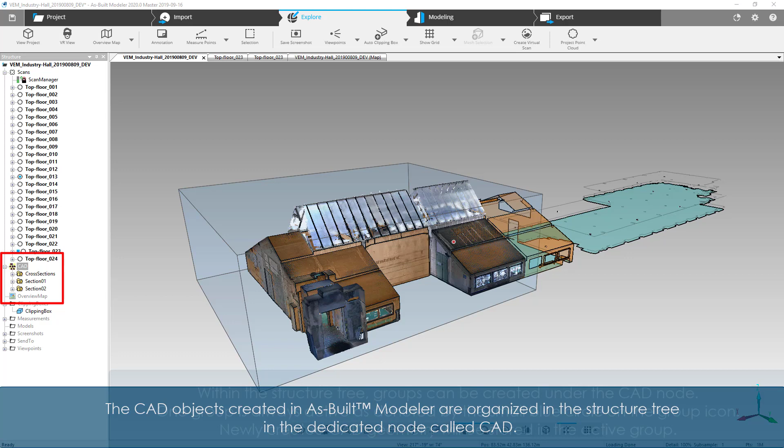The CAD objects created in As-Built Modeler are organized in the structure tree in a dedicated node called CAD. Within the structure tree, groups can be created under the CAD node. One group is always active, as denoted by the small blue circle on the group icon. Newly created CAD geometry will be stored in the active group.

Right-click a group and select Active from the context menu to set it to the active state. New objects will now be stored in this group. The structure tree not only allows you to organize your data, but also steers the visibility of your objects.

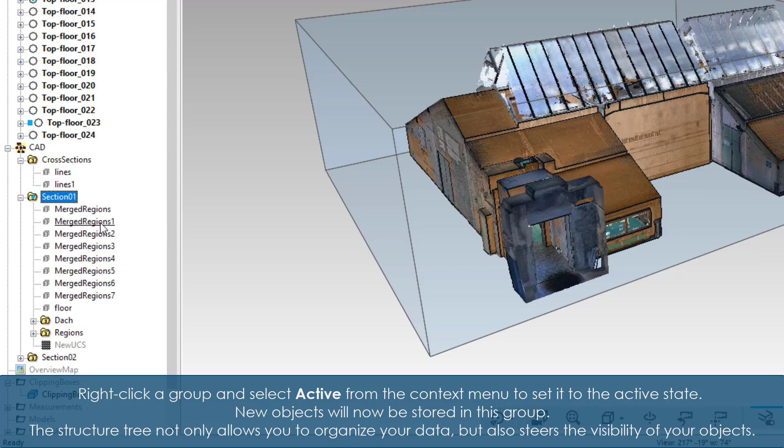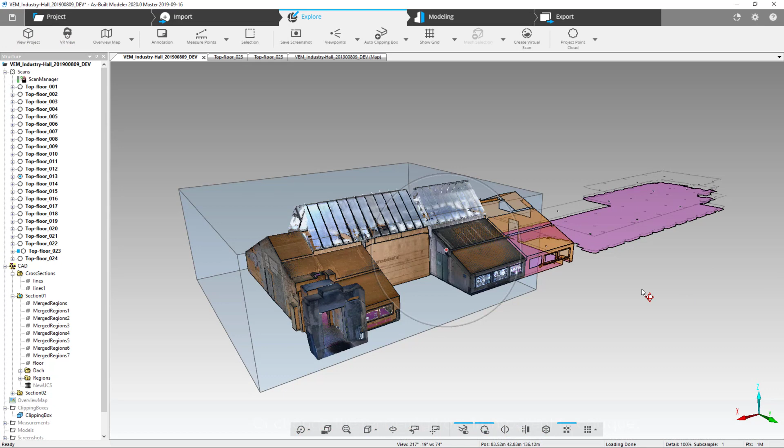First, from the 3D view, click a CAD object, which is then highlighted in green. Right-click the CAD object to get access to the context menu. A different color can be selected, for example, purple. Or change the rendering from transparent to opaque.

Notice that an object selected in the 3D view will also be selected in the structure tree, where the same context menu can be accessed.

The structure tree also allows multi-selection. Select a collection using the Shift key. Right-click the selection, then set a color for the entire selection, setting all to yellow.

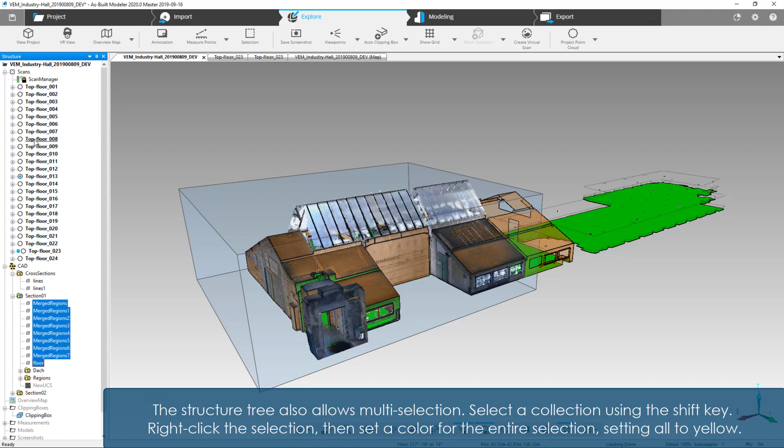The structure tree allows drag and drop operations. For example, create a new group in the tree and call it MyMergedRegions. Then select one or more CAD components and drag and drop them into the newly created group.

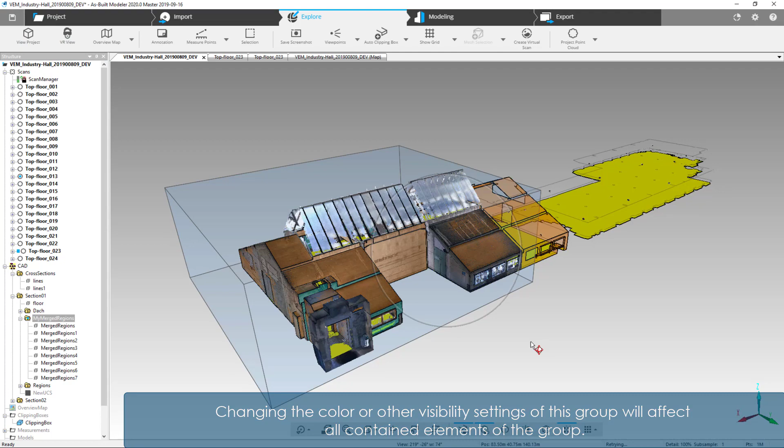Changing the color or other visibility settings of this group will affect all contained elements of the group. With the structure tree, right-click and select Locate, which will zoom the view to show the selected object. Now hide the point cloud to only visualize the CAD objects.

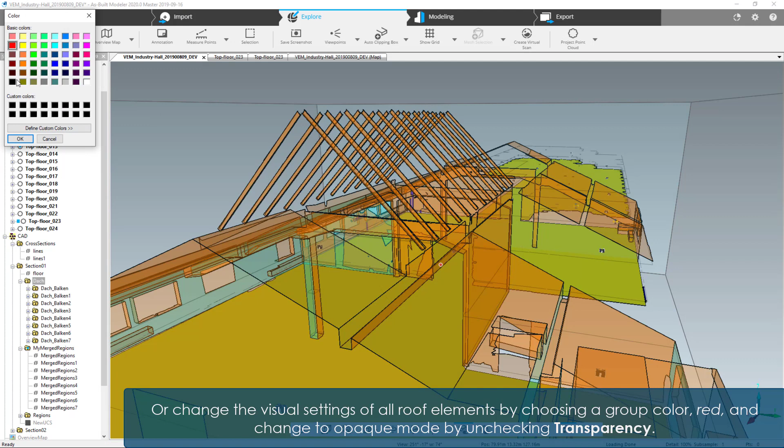Or change the visual settings of all roof elements by choosing a group color red and changing to opaque mode by unchecking transparency. And again, use the Locate functionality to draw closer to an object.

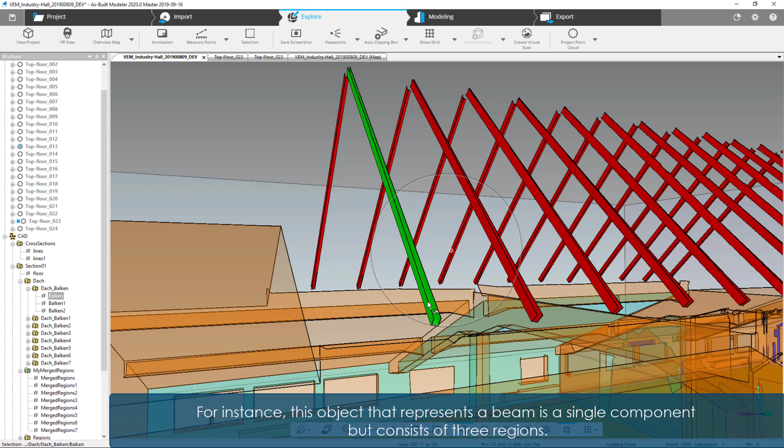With many CAD objects, you can combine different CAD objects into a single component. For instance, this object that represents a beam is a single component but consists of 3 regions.

Open the context menu with a right-click and select Explode. This creates a group and individual components for each region. This allows access to these regions individually.

Or this can be reversed. Multi-select the items and select to combine them to a single component, which is now a composite again.

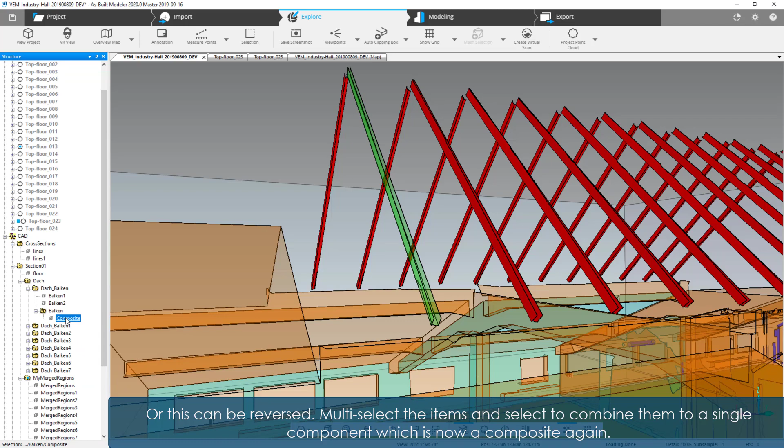Visibility settings performed on a group will start with the overall setting of the node. Here, this is transparent. Change this option, then all contained elements will change to opaque, and when performed again, changing all elements back to transparent.